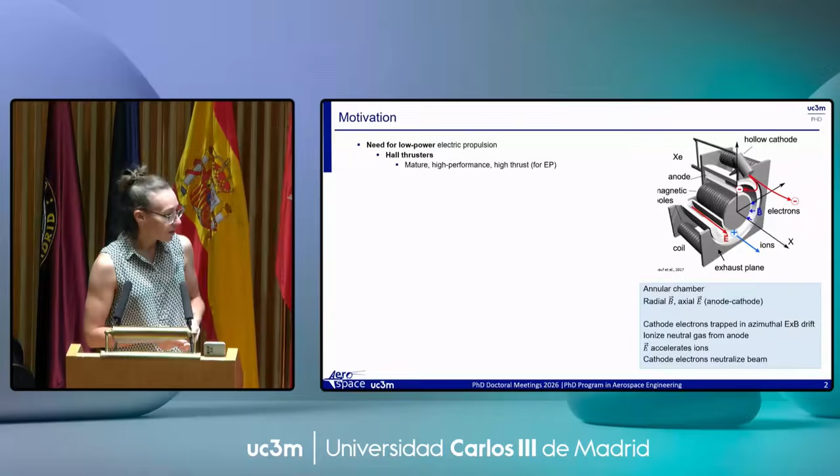So the challenges in downscaling Hall thrusters are, first of all, that there are no scaling laws. We don't know how to scale them to a specific target power. The miniaturization has some difficulties. It causes thermal issues. It causes problems of saturation of the magnetic circuit. It gets difficult to manufacture or to keep integrity of the pieces.

And you can see the top two pictures. It's a comparison of one of the biggest Hall thrusters that exists and one of the smallest ones. You can imagine the difference of scales. The problems that you encounter are not the same. And then decreasing the size of the Hall thruster, you get problems with increasing wall losses, erosion, and that affects the efficiency and the lifetime.

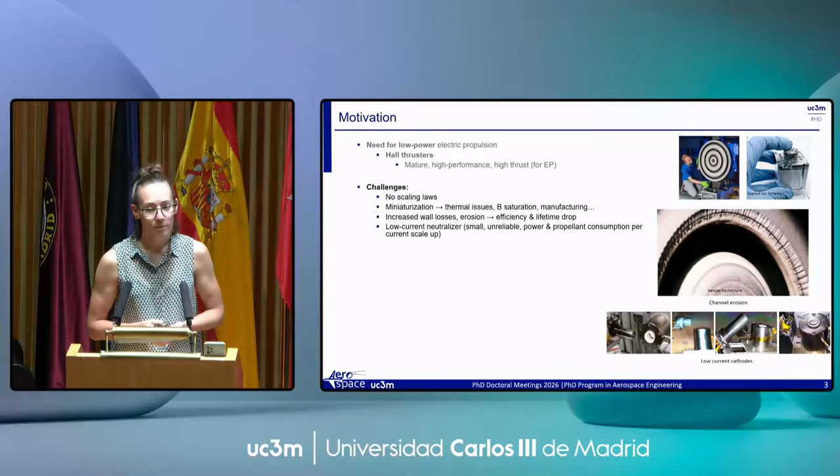Since you always need a neutralizer for Hall thrusters, you also have problems of the cathode neutralizer. When you size them for low current, you have issues. They get unreliable. They get less efficient as well. So our idea was to develop a cylindrical Hall thruster to address at least some of these issues. Why is it a good candidate for this?

It operates the same way a normal Hall thruster does, at least the general principle. But in this one, you see there is no internal pole, so it's a fully cylindrical or almost fully cylindrical channel. So you remove one surface to erode, you gain volume compared to the surface where you lose power. You avoid some small components, and in general, the engineering is a bit easier.

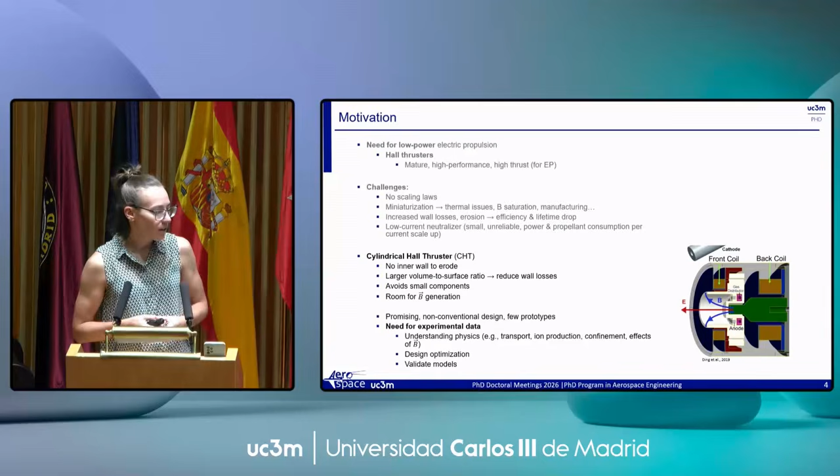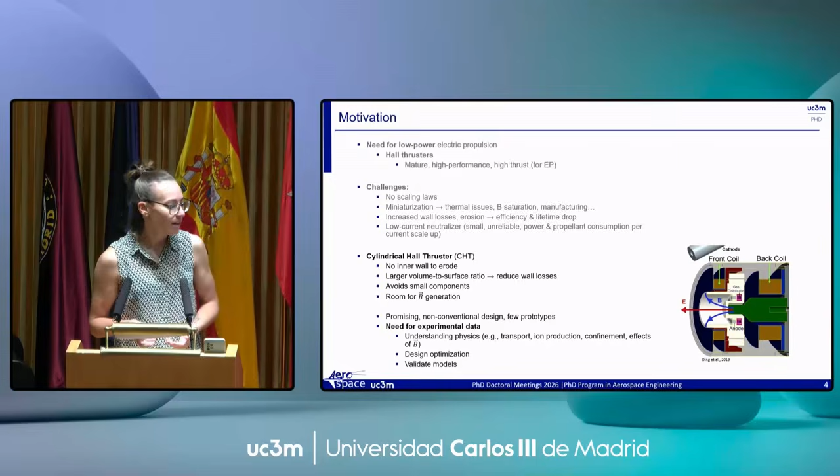And this is a promising device that is not conventional, and it's still recent. There are few prototypes, so there is a lot of research to do on it. And there is need for experimental data to understand the specific physics of this thruster and of Hall thrusters in general, and how to optimize their design. As well, we need experimental data to validate models, but my colleagues will talk about it better later.

So the approach was to design and build the thruster. You can see some of the steps of the design of the first prototype. Then there was a small part dedicated to modeling the plasma discharge with the code of the EP2 group. And then the core of the thesis was the extensive characterization of the thruster to understand how it responds to different inputs, to measure the plasma properties, to understand the physics inside,

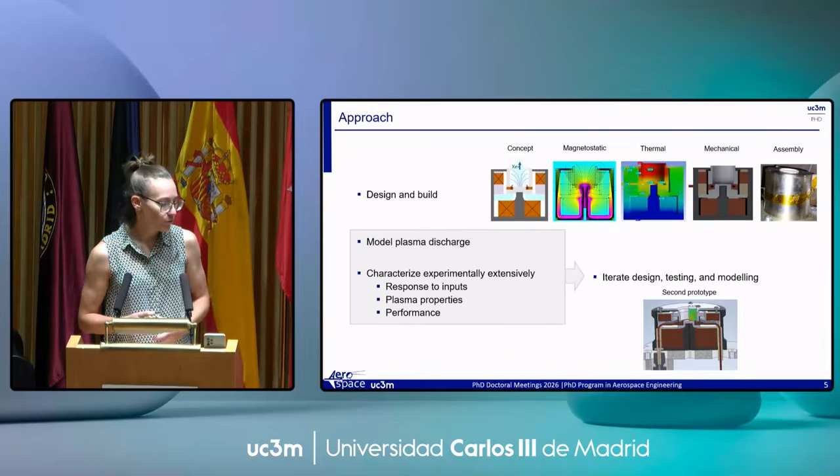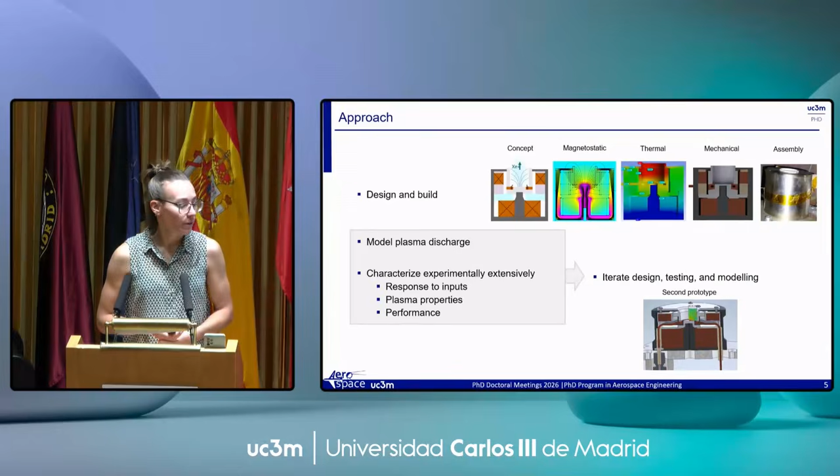and how the performance is affected by those properties. And then the step after that, of course, is to iterate on the design, the testing, and the modeling as well with experimental input to better match the numerical results. Well, the opposite. So there is already a second prototype that was designed and built and that is ready to be studied.

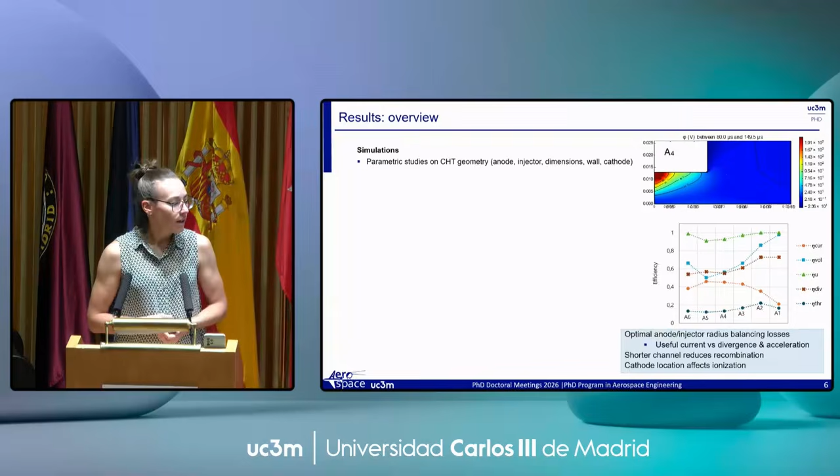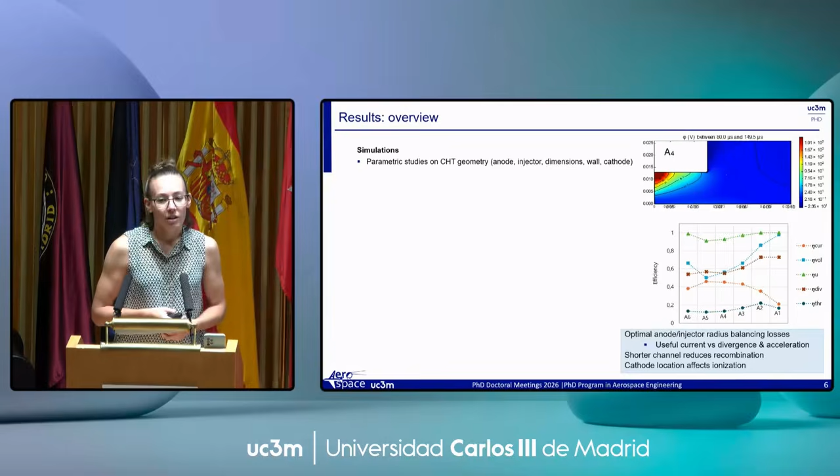So for the first part, at the beginning of the thesis, after the design of the thruster, I dedicated some time to doing preliminary studies with the HYPHEN code, a hybrid plasma code. It was mostly to understand the behavior of the plasma inside the thruster by varying some parameters, mostly geometric parameters: the anode location, injector location, the dimensions of the channel, some wall properties, and the position of the cathode. And from that, I got some insight on what dimensions would be best.

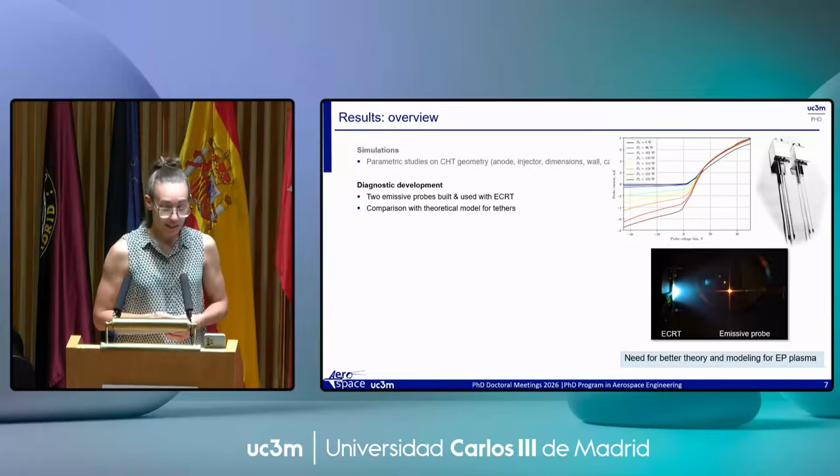I got during the thesis a small side quest, developing diagnostics for electric propulsion that I didn't directly get to use on my own thruster, but that I used on another thruster of the group, and that was also in collaboration with ECRT, the team working on ECRT. And it was compared with theoretical models for tethers. And the main conclusion I got from that, even if we had some useful results, is that we definitely need to develop better theory and better modeling for probes, for diagnostics adapted to electric propulsion plasmas.

And then the most important part of my work was the characterization of the prototype that came in 3 major campaigns. The first one was dedicated to the measurement of the plasma properties in the far field of the thruster with essentially 3 electrostatic probes. And from that, I varied different parameters, mostly input parameters, so the magnetic field, the mass flow rate, and the discharge voltage, and observed some trends of behavior in response to those parameters.

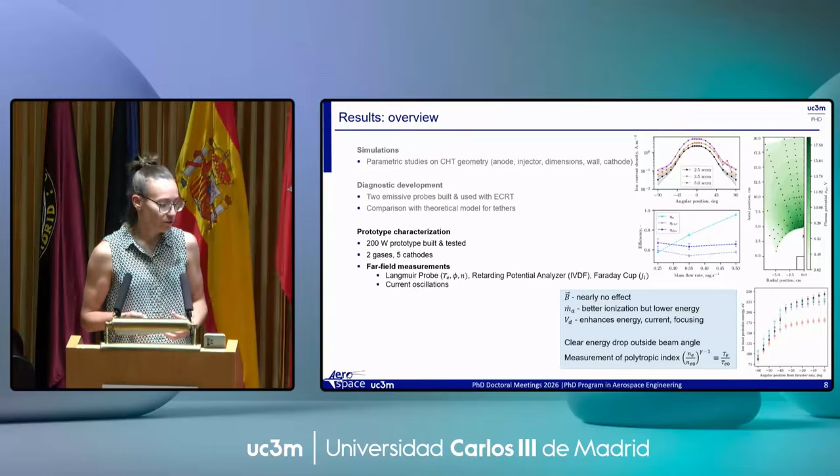The next campaign was dedicated instead to measuring properties of the plasma inside of the discharge chamber, which is much less accessible, and that was done with optical diagnostics to not disturb the discharge. So in this case, it's Doppler velocimetry done with laser-induced fluorescence spectroscopy, coupled with modeling of the spectra to retrieve the ion and neutral VDF, regardless of the conditions of magnetic field or of presence of isotopes, for instance, of xenon.

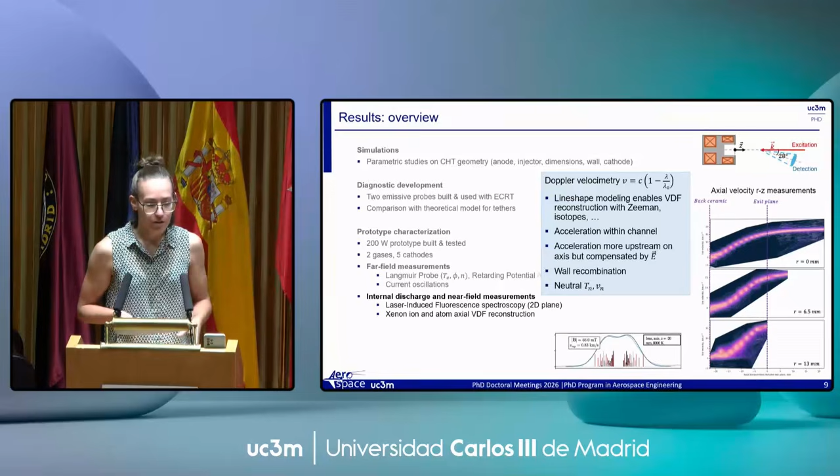And with this, we saw mostly that the acceleration in that thruster takes place mostly inside of the channel, which is very different from typical Hall thrusters, and that we have a lot of recombination of ions at the wall, at the lateral wall, and we also acquired some useful data, for instance, for modeling.

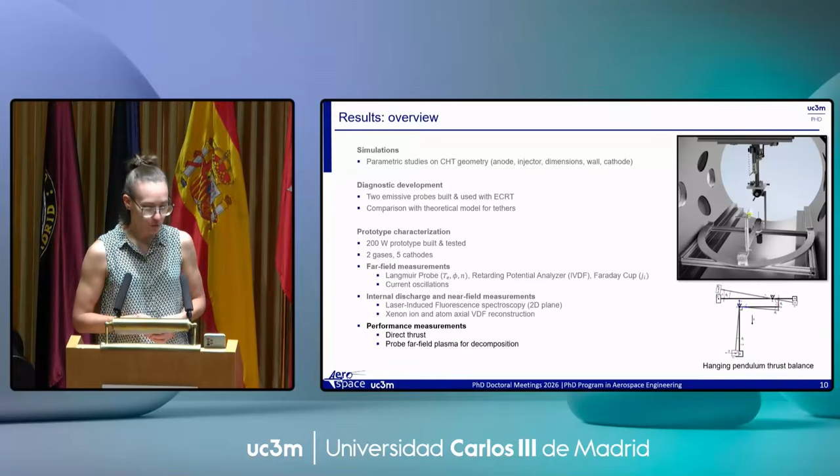And the last campaign was dedicated to measuring the performance of the thruster. So that was done with direct thrust measurements with the thrust balance that we have here in the lab of EP2. And again, electrostatic probes measuring properties of the ion beam in the far field to decompose the performance from the thrust measurement.

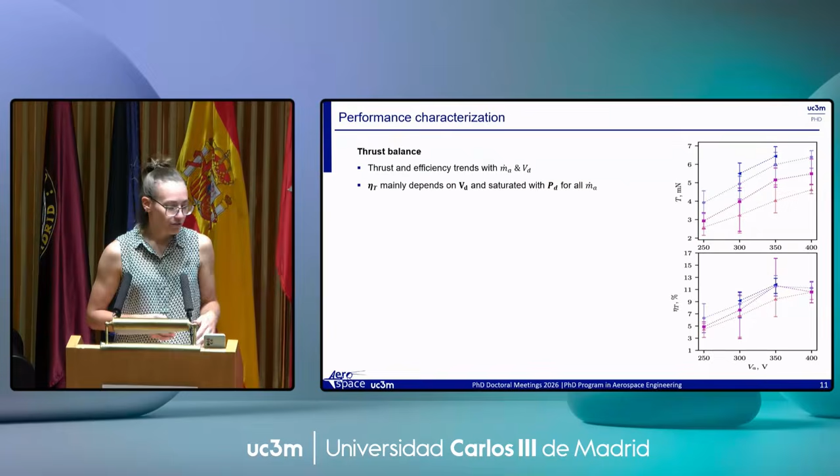So from the thrust balance, we measured a matrix of mass flow rates and discharge voltages to understand how the thruster behaves, how efficient it is at different points over the whole operating envelope that we could cover. And we saw that the efficiency depends strongly on the discharge voltage in that range, and that for all the mass flow rates, it saturates at a certain discharge power.

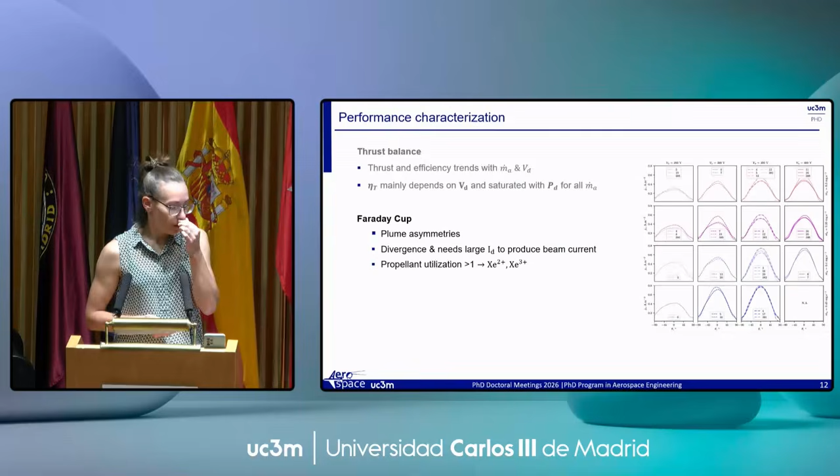In parallel, as I said, I measured the ion current density with a Faraday cup, which showed asymmetries in the plume, important divergence, which is also quite specific to this type of thruster, and in this case, more specific to this very device, that it needs a large discharge current to produce ion beam, so it's not using the current very efficiently, and that, as other people have seen in CHTs, we have most likely a significant number of multiply charged ions.

And then I measured the ion energy with a retarding potential analyzer, and the main finding was that it appears we have 3 ion groups of different energy that are dominant in different locations of the plume, and that appear to come from different ionization regions or production mechanisms.

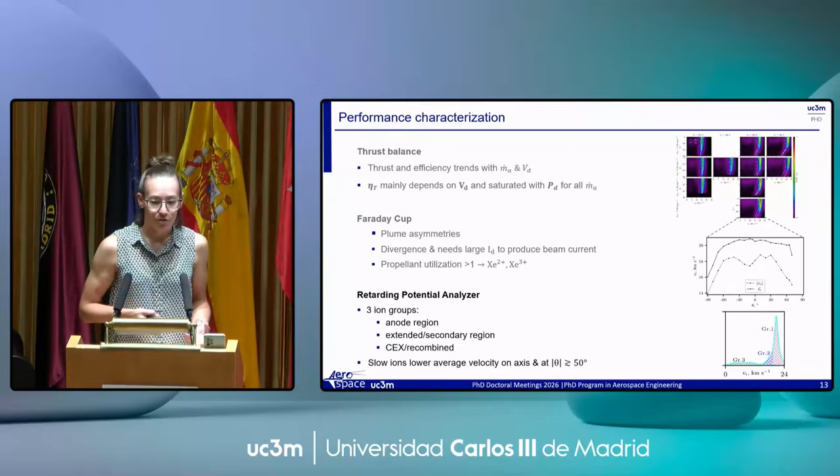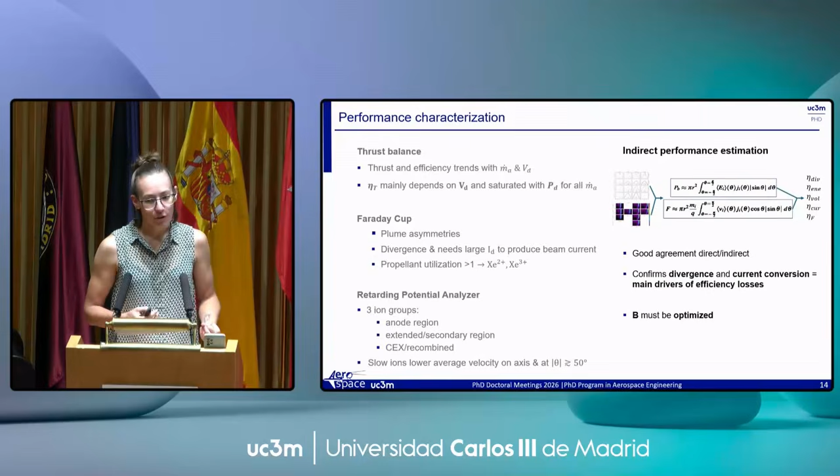Then I combined the data from those probes to estimate partial efficiencies. And this confirmed that the main drivers of efficiency losses in this device are the divergence and the current conversion, so of discharge current into ion current. And the first way to tackle this is going to be to optimize the magnetic field.

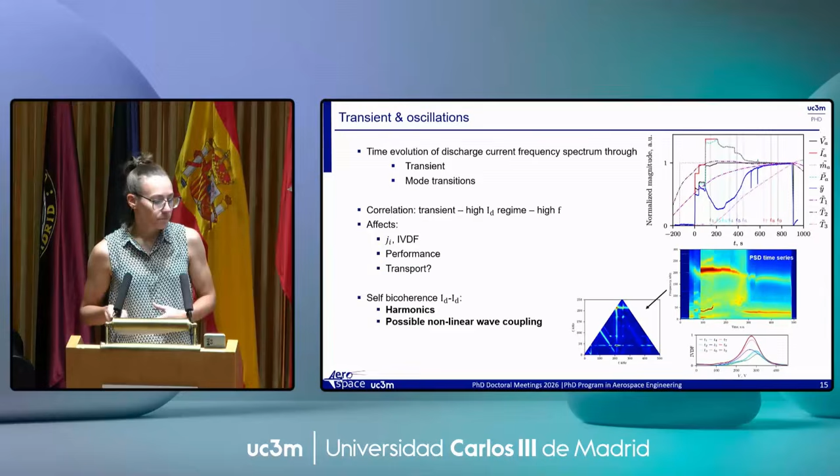Last finding of this campaign, very quickly, is that we observed a sort of correlation between the regimes of discharge current, higher or lower, associated with the presence of high-frequency oscillations, which appear to affect the performance of the thruster. And this is something that is going to be studied more in depth in the future.

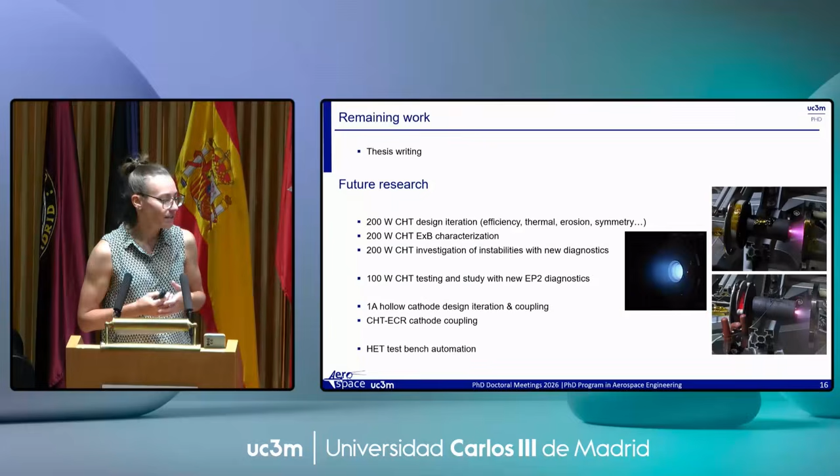And so now I'm left with writing the thesis. And I have plans for future research involving the 2 thrusters that I designed and hollow cathodes, development of hollow cathodes. Those are my achievements for the whole PhD. And if you have any questions, I'll be happy to answer.